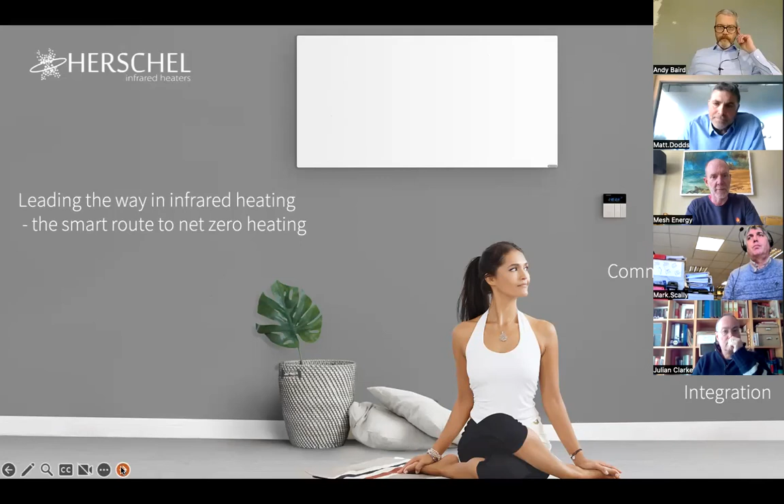I'll pick up here. The idea of this is really just to introduce infrared heating as a concept. We'll assume people have a level of awareness that it's out there, but maybe not a deep understanding of how it works, so we're going to work with plain English. We don't want to bombard you with the physics—there's a 3-hour lecture if you want to get into the high-end stuff—but this is really to introduce the concept and get you all comfortable with the technology, which we'd describe as one of the best and most affordable routes to, if not net zero, certainly an ultra low carbon heat and power system.

In terms of infrared, this is direct radiated heat. Almost all heating systems work by convection, which warms air, and yet air temperature has relatively little to do with comfort and rather more to do with the temperature of the walls, the floors and the ceilings and the spaces we occupy. Because we're heating surfaces and not large volumes of air, we generally use less electricity or energy to achieve comfort. Thereafter, those warmed surfaces lose heat at a much slower rate than air, so less energy is consumed to maintain comfort. That's why it makes it such a potent technology—we're essentially directly warming surfaces and people rather than the air, which readily escapes.

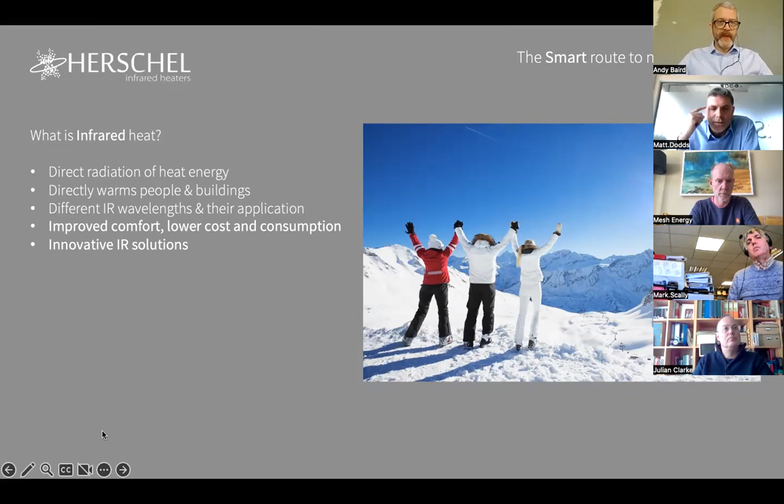Simon, sorry to cut in, Andy, if you click the button, I think there might be a graphic that comes up on that slide. There is, yes, hopefully. So there we go.

So that's demonstrating the concept that at a lower air temperature, you can achieve high levels of comfort if the surfaces are warmed.

Infrared is also a very innovative solution in that if you take the example of, say, a bathroom, you will usually need a mirror and a heat source. So you can combine the two in an infrared heated mirror. It's quite an interesting technology, and it has this sort of bi-functionality.

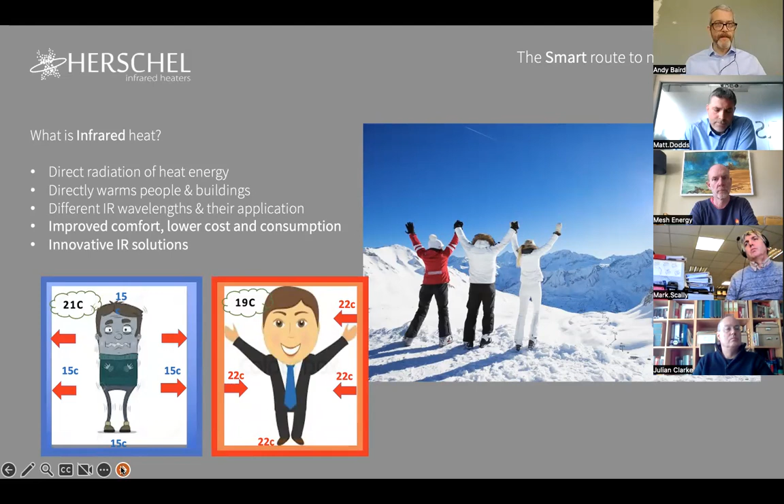If we could have the next slide, please, Simon.

This, as an energy hierarchy, won't be new to any practitioners, but it's something we focus on. Good design is all about designing out the demand for energy, and in this case heat, from the building through good insulation, good construction standards, good glazing, etc. Thereafter, we should look at using energy more efficiently, and that's pillar 2 of this hierarchy. If you've designed out as much of the demand for heat that you can, you then need to select a technology that's going to operate very efficiently within that lower demand.

And that's where infrared has a really strong and potentially scalable role to play. Thereafter, add renewable sources to generate your own clean electricity alongside a clean electricity grid. Albeit we have this hierarchy of 1, 2, and 3, there's an awful lot of focus on just doing the renewables because solar especially just makes so much economic sense at the moment. But in an ideal world, we would basically follow this hierarchy: design out the demand for heat, then use technology that uses energy very efficiently to provide comfort, and then provide energy from renewable energy sources and a clean electricity grid thereafter.

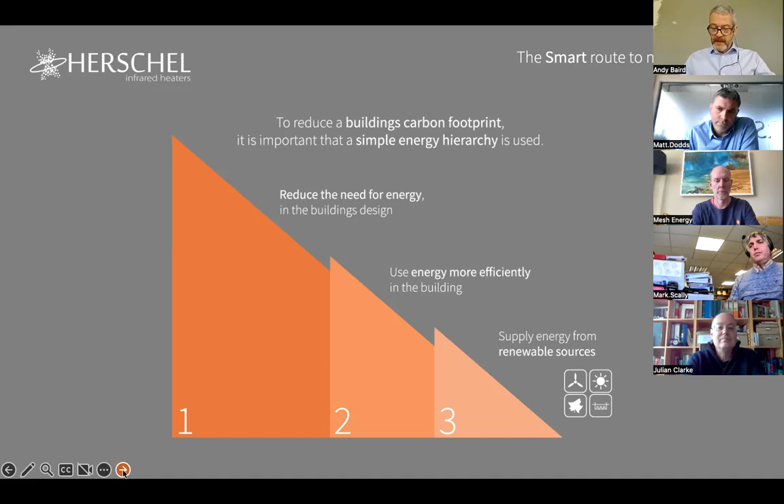If I hand over to Matt now for a few comments on the next slide.

So we introduced the technology to the UK about 12 or 13 years ago. And I think as infrared is becoming more popular and recognised, we've got to be quite clear what we define as being infrared heating, because there's a lot out there in the press at the moment with different technologies. And the concern I have is that consumers and specifiers are getting confused by what classifies as infrared and what doesn't.

Now, radiant heating is heat generated by radiation. As you'll know, infrared is the type of radiation used by the heater to directly transmit that heat from the surface of the heater to the environment around it. And that's important because there are set international standards, which are EN standards, for direct acting room heaters. Most critically, it includes measurement of the percentage radiance that infrared heaters have got to have to qualify. If they don't hit the criteria, they don't comply with that standard.

So the standard is clear that any heat emitting surface with a surface temperature of less than 75 degrees centigrade cannot be classified as a radiant heater and won't be considered at all. At this level, the radiant output is less than 40%, and the result is the vast majority of heat will be from convection and not from infrared. So a heater surface below 75 degrees centigrade doesn't have enough of a temperature difference between the heater itself and the materials it's trying to heat to be classed as a radiant heater. And that's important.

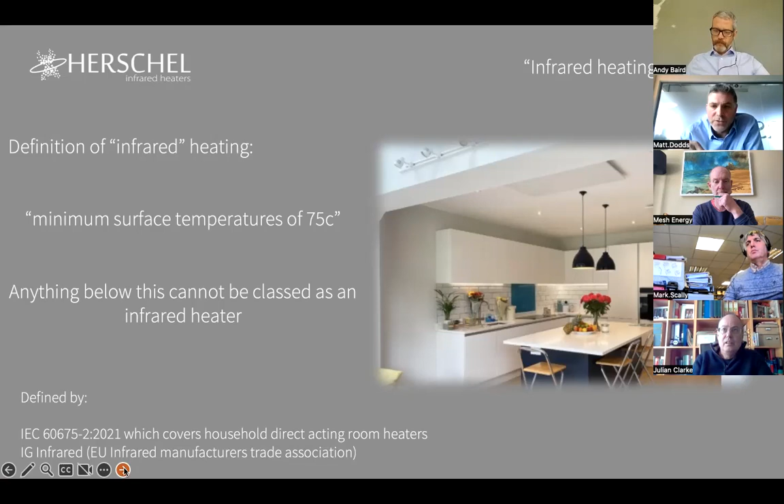We've got to be clear on that surface temperature to give us the benefit, and anything less has got to be looked at. Julian's come in with a question at the bottom there, saying yeah, the surface temperature is 75 degrees centigrade or more, but we are able to touch the heaters because that heat energy is spread across the surface area of the heater on the majority of our panels, which means you can touch it, but not hold your hand there for too long. It's the equivalent to a wet radiator on full, or the top of a convector grill, which actually has got a higher density.

Again, as with any heat type, we're not recommending holding your hand there for long periods, but the benefit of infrared, and where we want to be mounting them, is higher up on walls at picture height, or ceiling mounted ideally, to get space back in the room, and it gives a little bit of additional efficiency in heat output from a ceiling mounted position.

Okay, moving on to this slide. This is a summary of the first independent testing of infrared heating carried out in the UK. This was at Salford Energy House 1, which tested our premium range of infrared panels against an air-to-water heat pump and a standard electric convector heater, following SAP schedules and hours, over identical test conditions, which was the average temperature of a UK heating season plus 4.7 degrees centigrade. These are the efficiency results that came through.

As expected, the heat pump was providing an efficiency of 173%. The standard electric convectors were at 100%, and our infrared heaters were at 113% efficiency. That is because of the way we're warming the mass and objects in the space, and being able to lower the temperature on the thermostat by between 1 degree and 1.5 degrees, and still having the same level of comfort. We'll come on a little bit later about the controls and how important that is in the whole system and running of our infrared heaters.

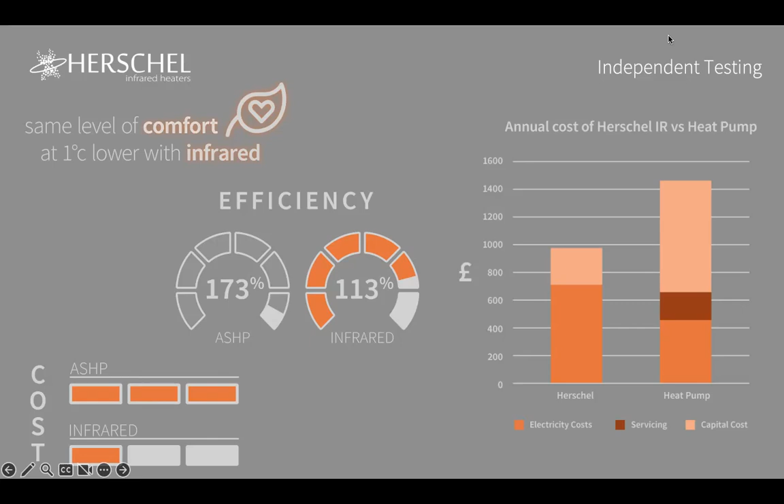But that was the reason why you're getting those additional efficiencies. And actually, moving forward with this next range of testing we're doing with Salford, we're going to be changing a little bit about the way we are setting those thermostat temperatures in those rooms.

The main difference that came out of the testing when we were comparing CapEx costs between the systems, looking at the heat pump and our system, was the high cost. It was around £12,000 for the installed heat pump system and £4,000 for our infrared heaters. This is on a 2-bed Victorian terrace, so supply and install. But that doesn't include any grant monies from the boiler upgrade scheme. There's still a big differential between the two systems.

And again, you'll know heat pumps have got their place. We're working with a lot of people on hybrid schemes.

Some people might look at a heat pump on the ground floor and infrared heating on the upper floors, but it's about suitability in a Victorian terrace arrangement like they've got in Salford, and what's going to work in different environments. Current policy needs looking at, because there is no one-stop silver bullet solution for heating these environments. With the additional cost of CapEx for a heat pump, we're saying consider infrared, invest the additional saving in upgrading your fabric performance, and look at solar PV and batteries as well. That's where we've come out on that test.

The key headline comment is infrared is absolutely zero maintenance. There's no ongoing service, parts replacement, etc. It's very important that we look at the total cost of ownership throughout a technology's lifespan. So yes, there's certainly a capital cost advantage at the front end. There's also an installation cost advantage because you're just using standard electrical trades. There's nothing peculiar about infrared. If you can basically put lighting circuits together, you can put heating circuits for infrared together - it's just different loads, fusing, etc. But basically all of the cost is at the front end, and those costs are very competitive with all of the alternatives.

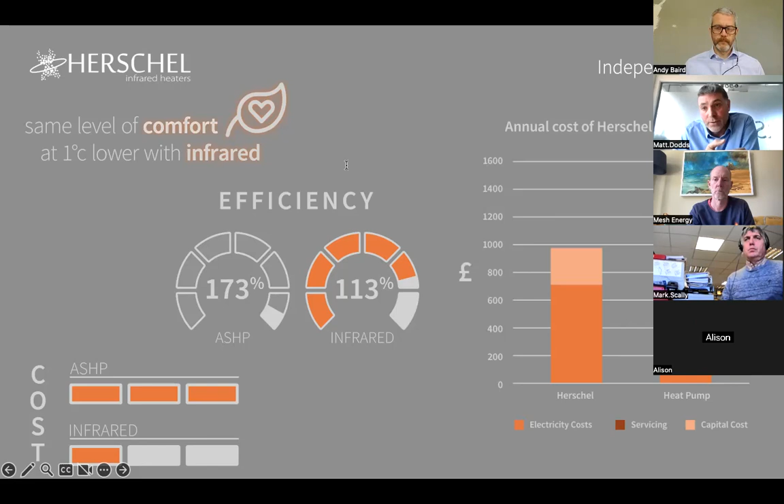That would mean, in theory, and we've been testing it here, that you would have full output from possibly two elements within the panel, and then you can go to a lower setback on part of the heater and one of the elements to provide an underlying level of heat, just a gentle top up without it being on or off completely. That's to be provided more information in due course, but it's something that's been looked at.

Paul, did you want to come off mute? Just talk about your particular scenario. Can you hear me? Yeah.

Excellent. We're hopefully going to get planning permission through this week to put a big extension on our house to get my parents in with us. Tied in with all that, I want to try and get rid of the existing boiler and put infrared panels in to heat the rooms.

Initially I was thinking, could I get away with not putting that in all the rooms? Perhaps put it into the wet rooms, and let the MVHR that we're going to put in take that, because that will be drawing heat from the kitchen and bathrooms and redistribute that. But is that really the way it's going to work with infrared panels? I could imagine it working well with a radiator.

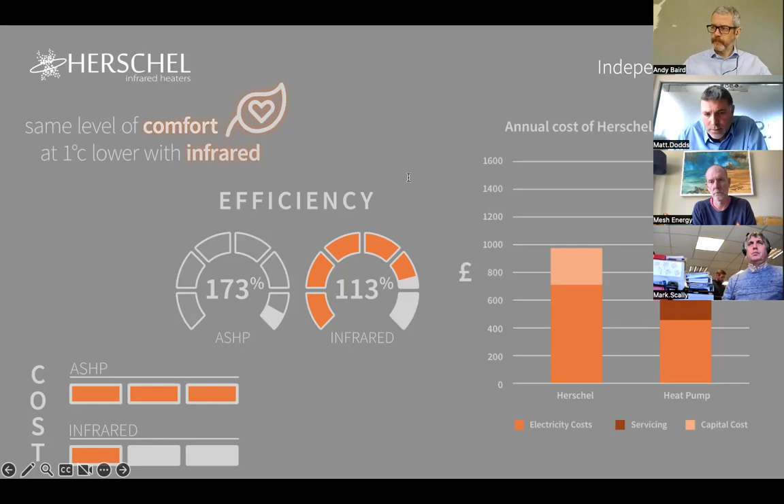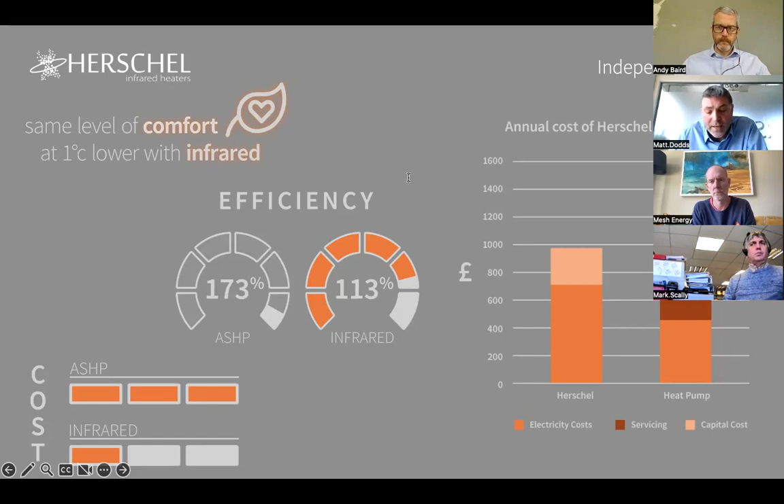We can be looked at as a full solution. We can also be looked at as a top-up solution for other heating systems if needed. One of the key points with customers coming into our showroom is that the capital cost and disruption of some heat pump systems is putting them off. Some say they can't fund that cost up front.

They're looking at ways of phasing a change in heating over time. If they wanted to retain a gas combi boiler, which I've done in my property, I've actually isolated two radiators and capped them off in the kitchen. I've done a kitchen diner knock-through and put infrared heaters in there. So people can phase it over time as the position changes and legislation changes towards fossil fuel heating. You can look at it room by room, and also with the rooms where you might benefit from MVHR or not, but absolutely you can phase it.

That's what I'm suggesting doing in quite a lot of environments - if people want to experience it before committing to a whole house retrofit with infrared or a combination, get it in two or three rooms, start with that, and make sure they're comfortable with the way it works for them.

Do your systems integrate? Will I get them integrated into Home Assistant? We're working with Google - we've got Alexa and Google Home with Smart Life, but some of the other automations with Smart Life depend what you can do with that and what the links are. But certainly with Google you can.

Because we'll be putting sensors in all the rooms, we can detect whether there's people in there and what the actual temperature is, to decide whether we need to turn the heaters on or not. What's quite interesting with Smart Life is you can set scenes and automations and tap to run functions on the thermostat settings. We've combined them in the office here with PIR sensors, so you can have if and when statements within the thermostat settings.

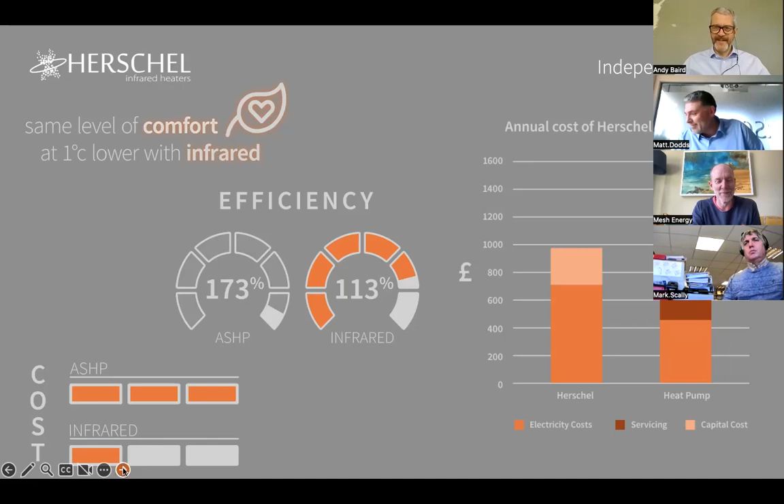Should we move to the next slide? I'm just conscious of the time, but it's great we're having lots of questions. I want to come on to how it works with other renewable technology, especially when it comes to heating water.

This is a summary of modelling carried out by a SAP Assessor local to us, in a typical 3-bed new build property. You can see the significant difference in CO2 emissions between infrared, gas, and air source heat pumps. But to get your rating high enough to pass, you need to add PV, and in some instances a combination of solar PV and batteries, to hit that target.

I'm doing a lot of work on the lobbying side, speaking with government about testing on infrared. There's a stage 2 trial underway, led by Leeds Beckett University, looking at different technologies in the Salford Energy House environment, and testing infrared heaters of different types. That should lead in the next 3 or 4 months to confirming a larger home trial with occupiers.

My understanding is that infrared heating will form part of a separate category in the next iteration of SAP 11, to coincide with the future homes standard in 2025. That's what the people at DESNZ are saying, but it's about the speed of doing it for us.

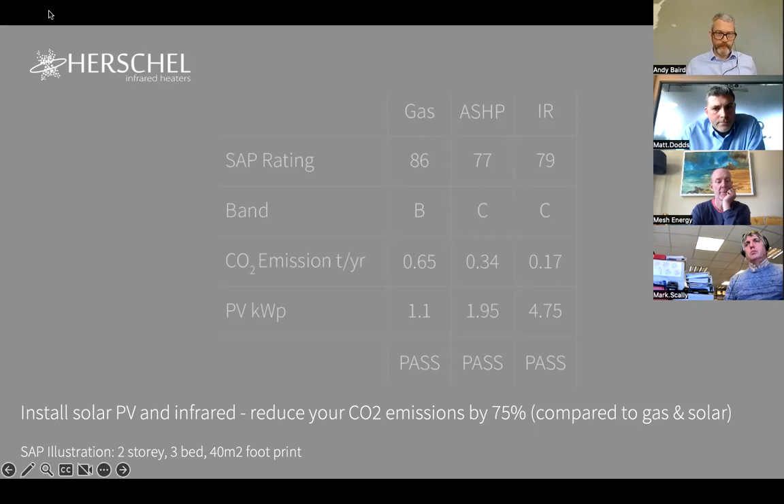Cheers, Andy. Shall I move on to the slide, Matt? Yeah, if you could, please. It's probably back to Andy.

There's not a lot of information here - it's really to highlight the importance of control. We are very modular, so controls are very much on a per-room basis. That's the case with any heating system - all heating systems should have control - but the level of granularity we can achieve is quite unique because it's radiant and we're working with warm surfaces rather than air.

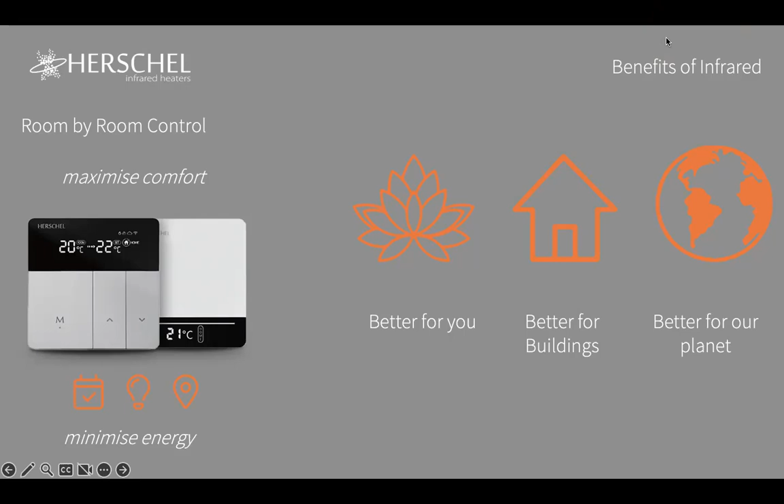There's a range of thermostats available. A key point is that convection and radiant heating behave quite differently. Convection tends to be a straight line - you put in a unit of energy to achieve a unit increase in temperature. Radiant heating is different: from a very cold start, around 5 degrees, you need relatively more energy before you get an incremental increase in temperature, but then you hit a steep curve where relatively less energy is required to keep raising the temperature.

When we talk about setback temperatures, it's important to think of around 14, maybe 15 degrees as a setback temperature, because when you do need comfort, infrared has less work to do than convection to get you to your notional 21 degrees. Albeit, based on end user feedback, a lot of people are quite comfortable at 19 to 20 degrees when a conventional system would need 21 to 22, even in the depths of winter, because of the whole concept of heated surfaces versus heating air.

That's where some of the running cost efficiency comes from - controlling each room and minimizing the demand for heat on a per room basis by taking the temperature down half a degree every week until you reach the minimum temperature you're still comfortable at. There's a slide coming up where I'll share some end user feedback on that. Controls are very important, just as important with us as with any other heating system - absolutely key.

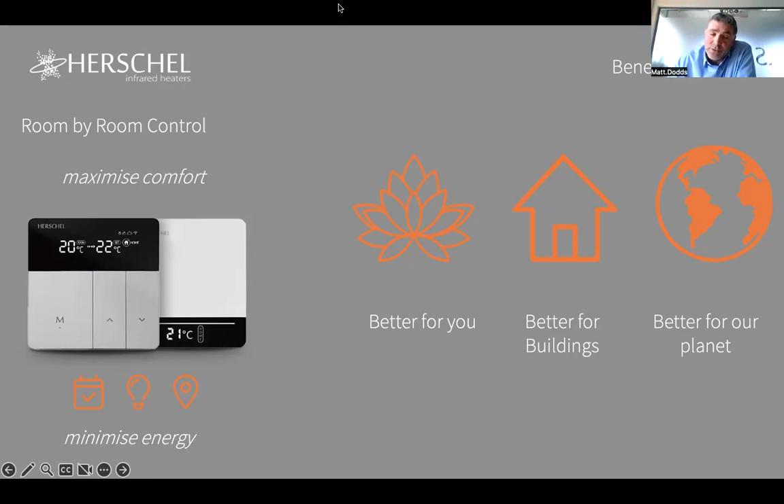No, that is a secondary approach. Some of them have got the heaters sitting close to where they are, standing close with feet close to where they are, and they do have inbuilt thermostats or can be paired to a thermostat to comply with Lot 20 guidelines and regulations, so that's not an issue. Quite often it's topping up an existing heating system in a certain room if they feel it's not enough, but quite often they are using it as a sole solution, so it isn't just a secondary heating solution.

Stephen, who is a passive house consultant, has asked a question regarding any issues using this system in a passive house with regard to compliance with their strict criteria. No, not that I'm aware of. We've been doing work recently with BT Passive over in Norwich, and they've got a few larger schemes that we're involved in over in South Wales, where they've had our heaters and been testing those and seeing how that fits overall with MVHR - that's one of the main reasons they chose the system. But no, from a compliance perspective, I'm not aware of any issues.

I'm not sure if we referenced Alex's question regarding where the panels are facing, and are they able to warm all areas of the wall sufficiently to prevent corners falling below the dew point? Positioned correctly, yes it can do. I think it's about what's happening in those corners, because you're going to get conduction - when some of the spaces are warm, the surfaces are warmed, it will be conducted across those surfaces. If you've got a particularly difficult damp space and you're putting furniture into the corner blocking it, that may be an area you need to look at in more detail. But no, it's the balance of temperature - that's one of the key bits of feedback we get from people using the heaters.

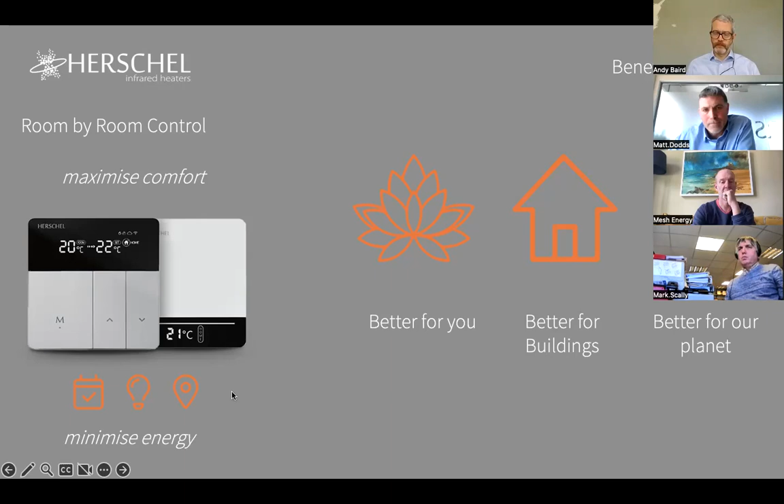Okay, cool, thank you. I'll just move on a slide - I'm conscious we've 10 minutes to go and lots of questions coming in. So back to you, Matt, just for some general headlines - I guess this slide is basically just some of the key headlines.

So it's practical in terms of being relatively simple to install with minimal disruption in both retrofit and new build, cost effective in terms of capital costs, running costs, and zero maintenance thereafter. And obviously there's the commercial and industrial work, which isn't really the focus of today, but it's certainly a big part of what we do.

The only comment I'd make is we can pretty much heat any space. We've solved heating problems that no other system was able to do, I'm thinking large warehouses, where you're almost trying to create a thermal envelope within the space, maybe 20% of the entire area, because radiant heat is directional. That is certainly achievable. So again, restating the point, it's modular, very simple, and can be scaled to the requirement of a particular room, even in hard to heat spaces where the demand is higher.

Full control room by room and optimum comfort levels. It's hard to articulate, but the feedback consistently is that this is just a really comfortable, nice heat to live with, rather than thermal swings high and low where people start to feel the space is a little bit stuffy. Robert Llewellyn said when he appeared on a webinar not so long ago that he's kitted his home garden office out with infrared heaters, and he was saying how well it works in that instance.

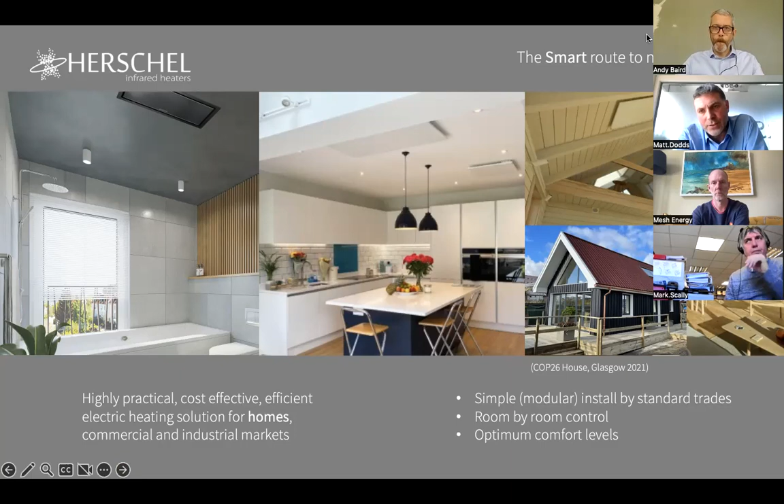The image top left there, on the ceiling, that's a new product we introduced about 3 or 4 weeks ago called our Crystal Heater. It's 60 by 30 centimeters, with a much higher surface temperature, so there's no visible light from it, but it's certainly nothing you could touch, compared to the white panels you see to the right. You're getting an output of 600 watts or 1,000 watts from the same size heater, and you can chop it in flush with a plasterboard ceiling. So you've got a frame there, and that's getting quite a lot of interest. It comes in white or black, the white available from June, but lots of developers and homeowners at the moment are interested in that.

So how does the system work, if you were to go with solar and infrared, then the solar is going to work with your hot water system. For some people, which is how I'd probably look at it with some of the rental properties, you'd migrate towards using something like the panels, but at the point where you can no longer have a gas boiler from a hot water perspective, what does that solution look like?

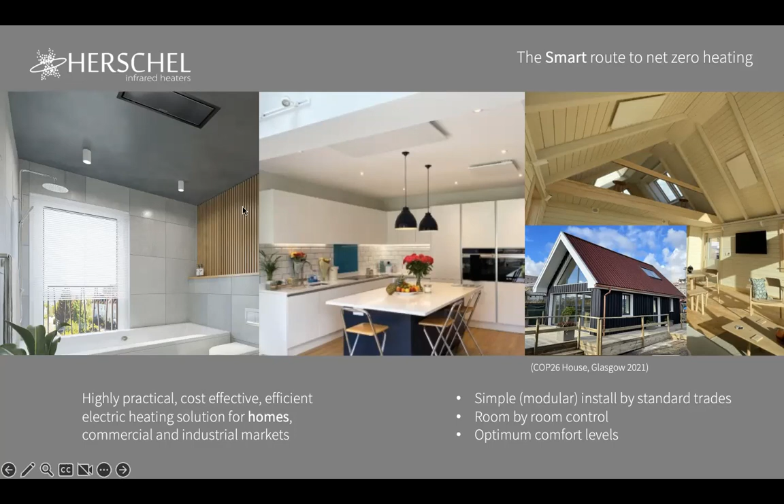Well, that probably is the next slide, I think. So moving on, that's what we have branded as Hydronova, because we have a smart control switch which we're including in the package. But what's behind that is the Sunamp Thermino, so we're not getting away from that, that's what the product is. We branded it Hydronova. It's a phase change material, a thermal battery.

You may well be aware of that already. The benefit is you're not storing big volumes of water, and it reacts quickly when charging. It can be directly fed from solar to charge a 2.8 kilowatt element at the bottom of it, so you can charge it off peak or directly from solar. What we're selling are the equivalents of 150, 210 and 300 litre cylinder equivalents with the models.

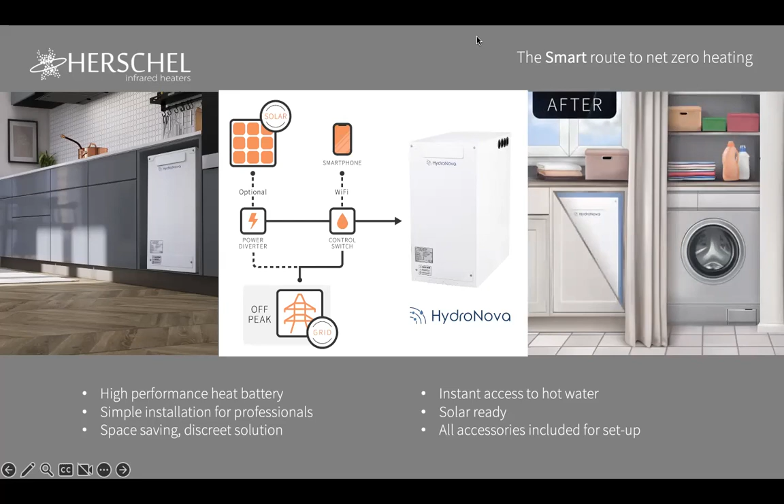In terms of weight, you've got to consider where they're going, because the smallest one is about 137 kilograms. If you're taking the larger models upstairs, you need to look at how you're going to do that and where it's going to be stored, albeit it's probably an equivalent weight to having a large cylinder for water. But if you can put this on a ground floor, in a utility room, a garage, or under the stairs, which is what I'm considering, then with a feed of water, you just need a cold water feed to it. That's enough, with standard pressure, to provide water throughout the rest of the property. Your sizing will depend on occupancy, number of bathrooms and kitchens, and the number of people in there. But it's a neat solution and a different type of hot water solution.

Cool. Okay. Thank you.

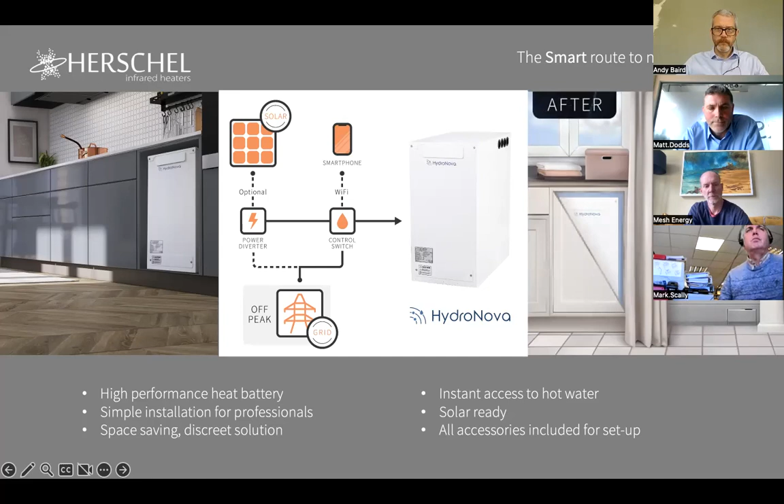Are there any more slides? I think I've got a couple more. I think it's still me, but it's probably just showing some examples of the other spaces.

We're doing a huge amount and being contacted by lots of companies for warehouse spaces at the moment, who are looking to get away from gas in particular and big space heaters. These are a couple of examples: one's a cafe area on the left, quite poorly insulated concrete frame. The one on the right is a typical warehouse space we're looking to heat, using ceramic element heaters, which we'll show in a minute alongside another heater type for churches that we've just launched.

My first question, as it should be in all of these spaces, is: do you really need to be heating these environments in the full way you have done in the past? Because at the moment you've got that gas to electric kilowatt hour differential, so you're going to have to try and find ways, if you want to heat whole spaces with electric, of offsetting that with solar and batteries, or some way of reducing that kilowatt hour price.

My first question is really, do you need to heat all of that storage area in the same way you have done with gas and other fossil fuel heating? If you can just keep it to task heating and spot heating where people are at packing benches and other spaces, that's where your most efficiency is going to be. Use less - that's where your main win is going to be. So that's where we've got to start.

And if we can't, then we're looking at other solutions between racking, and it will depend on heights of space and whether they want to maintain a level of temperature across the whole environment for longer periods, or whether it's a fast warm-up spot heating for short periods of time. So there's a different approach.

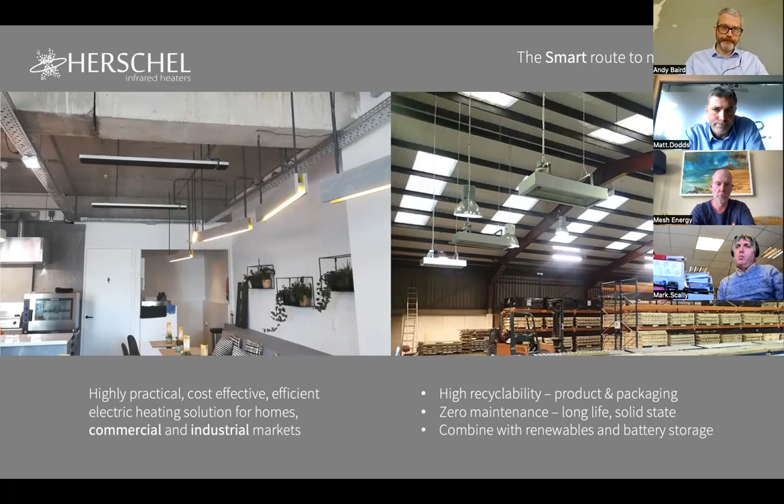Okay, just got a couple of minutes left, I'll just quickly rattle through this - just a few comments. So this was, again, I came from solar, looking for the heating equivalent of a solar module. This is one of the first projects from 2015, so it's been around a while. It was a domestic refurbishment on the north coast of County Antrim in Northern Ireland.

A 4 kilowatt SolarEdge system, an Eddi to pick up surplus diverted onto the hot water cylinder. The customer was looking for an innovative, future-proofed heating system, so they visited the house here and actually saw infrared working alongside solar. The key message from this was, firstly, the ease of integration with the renovation program - it's one of the simplest things. The kit arrived when promised, was installed by the site electrician, and was set up literally in less than a day.

But what was really interesting is this whole idea of operating at a lower temperature. Drew had done a very good job in terms of the insulation and the glazing - he was designing out the demand for heat. But even now, in the depths of winter, he's able to maintain absolute comfort throughout the house at just an 18-degree air temperature. With the contribution of solar displacing some of the running costs, particularly in the spring and autumn, the feedback has been very, very positive.